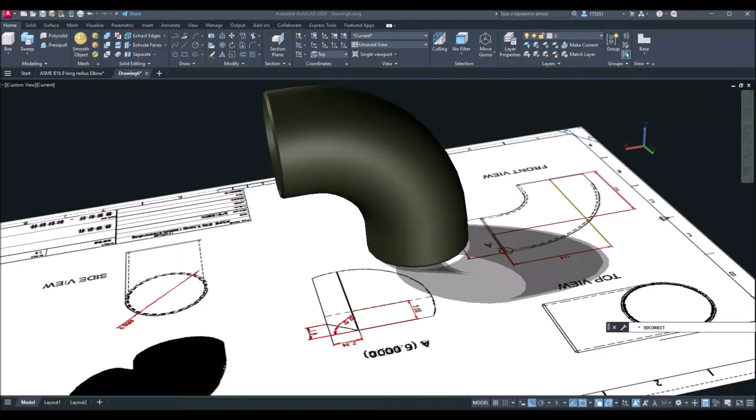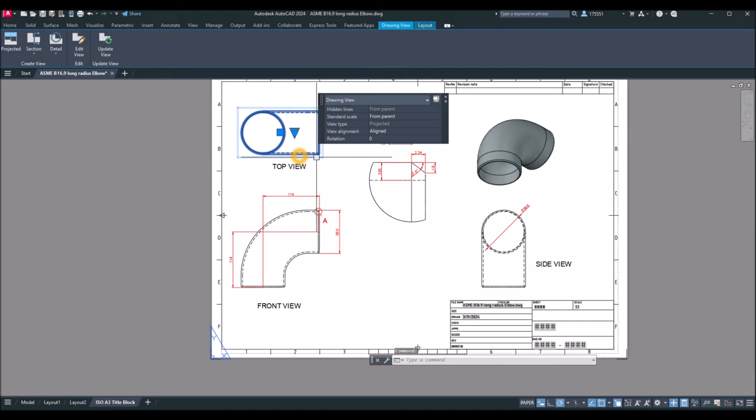In this tutorial, I'm going to draw a long radius elbow, a 90-degree long radius elbow. This is my reference drawing, showing the front view. And this here is the diameter.

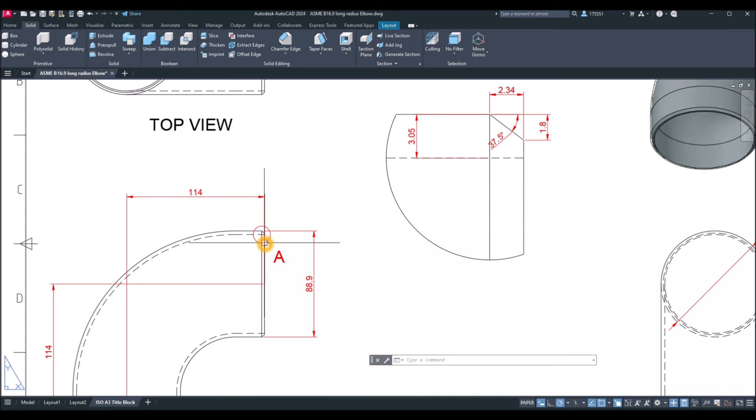Looking from the front view, and from the side view, this is the diameter, and this is actually this corner here. I scaled it 6 times. So this is the distance from the beveled end, which is 2.34, and 1.8 downward.

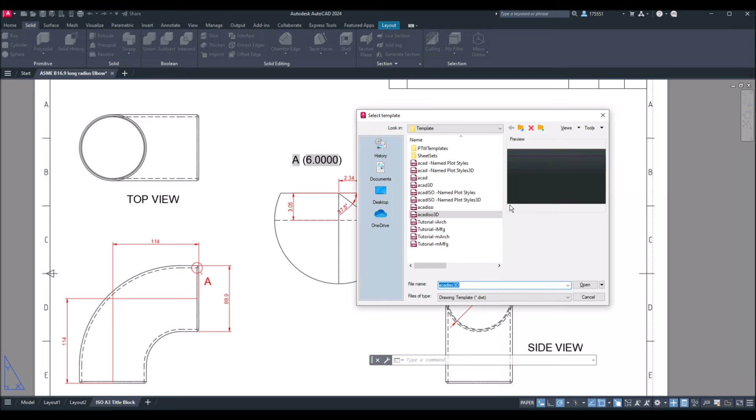I got that using a 37.5 degree angle, and the thickness is 3.05. Alright, so let's start a new drawing. Click this dropdown arrow, click new, and since I'm using millimeters, I'm going to use the AutoCAD ISO 3D template for metric units and click open.

I'm just going to arrange my window. Go to view, tile vertically, and make sure to work on parallel projection. So click this dropdown arrow by the view cube and select parallel, and also start working from front view, which is this one here.

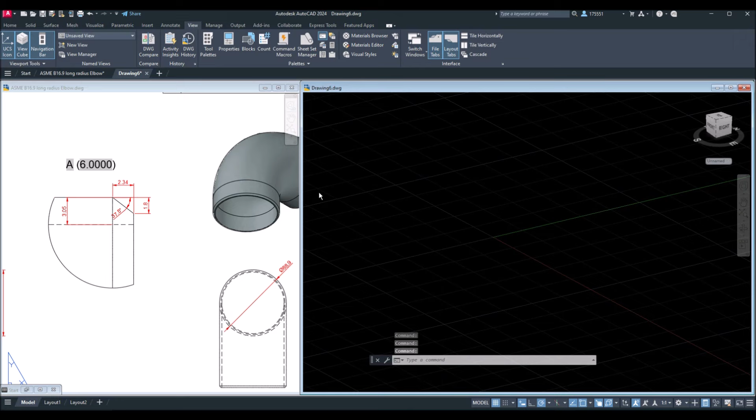Now I'm going to start with line. The distance from this midpoint to this midpoint, the horizontal distance, is 114. So L for line, go sideways for 114, go downward for the vertical distance from this midpoint to the midpoint here. Also turn on your ortho mode and dynamic input inside the status bar. I'm just going to turn my ortho mode on for now. So 114.

Now apply fillet. Go to home, and inside the modify panel you can find fillet here. Select the radius option inside the command window and enter 90. Enter, and select the objects: first object, second object.

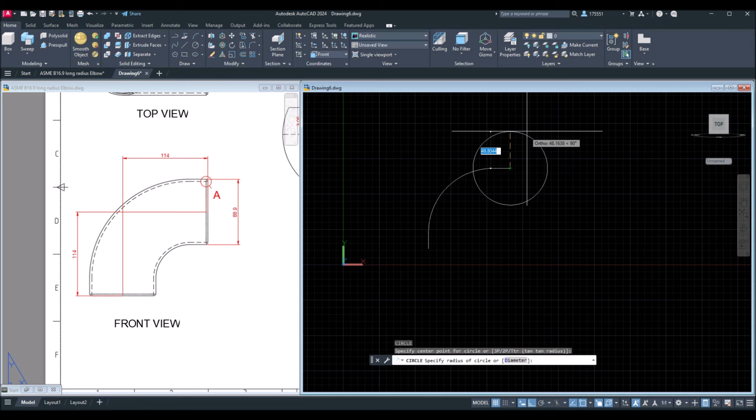Now I'm going to join the segments because these are broken segments. So J for join command, and just window the whole thing. Now this is one polyline. I'm going to draw the circle at endpoint and enter D for diameter option, and enter 88.9.

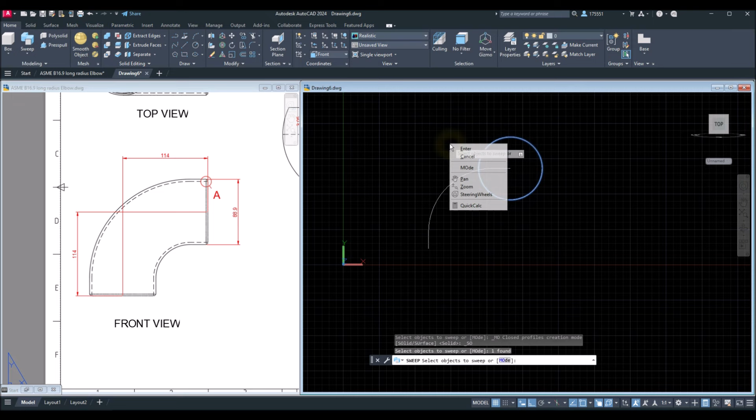Now I'm going to use the sweep command. Inside the modeling panel, click this - in case sweep is not showing, just click this dropdown arrow and select sweep command. Select the object you want to sweep, right click, enter, and select the path.

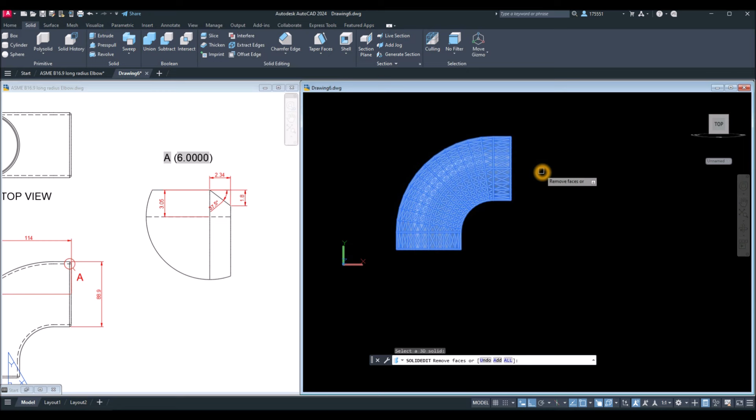Now I'm just going to turn off the grid, and the thickness for this elbow is 3.05 as shown here. So I'm going to use the shell command. Go to solid, select shell command, select the object you want to shell, and hold down the shift key and the wheel of your mouse to turn this around and roll it forward.

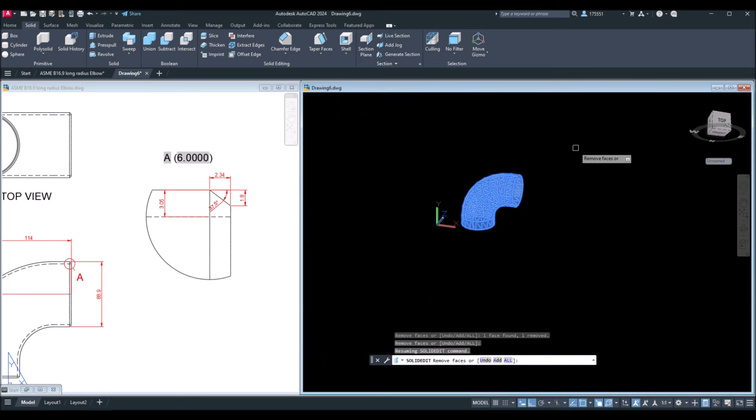Just be sure to make it closer, and click undo, one of the options here at the command window. Click undo, and undo this face because this entrance is going to be opened. Bring this closer again and select this face here. You can tell it's the right face because it's going to turn gray color, and enter. Thickness is 3.05. Enter, and enter again.

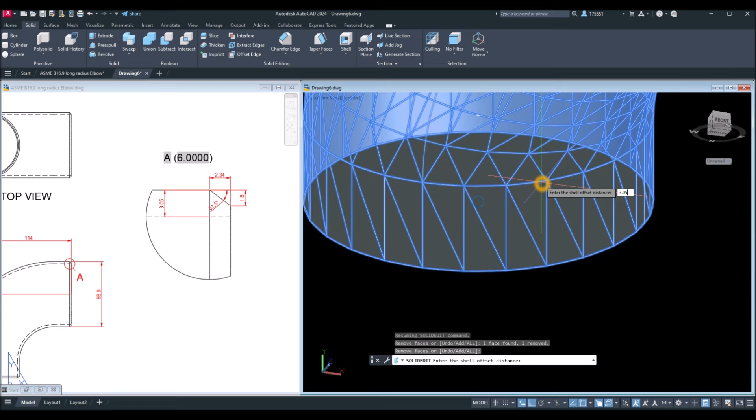Now the end of this elbow is beveled for 37.5 degrees, and I figured the distance here is 2.34, and downward is 1.8.

Inside the solid editing panel, select chamfer edge, and go down to the command window again. Select the first distance, 2.34. Enter, okay, 2.34, enter. For the second distance, click this distance option and enter 1.8, enter again.

Okay, I'm going to redo that. Chamfer edge, distance is 2.34. Enter, and specify - see, AutoCAD is asking to specify second distance, and enter 1.8, and enter again. Select an edge, so select this edge here.

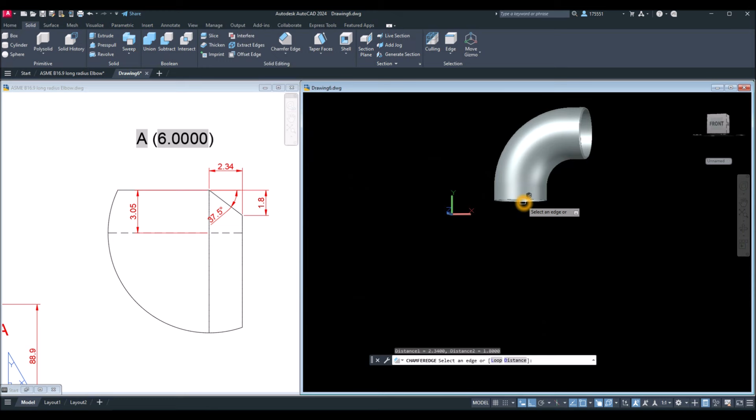Enter again, same process. Just right click, select chamfer edge, and just click that edge. AutoCAD remembers the last value that you entered. So click that edge, enter, and enter again.

Now I'm going to bring my drawing to front view and check, and bring this to 2D wireframe. I'm just going to check the distance here if it's correct. Okay, this distance from there is 2.34, so that's right. Right click again to repeat distance. Just click that, and from there - see, it's 1.8. So we're good.

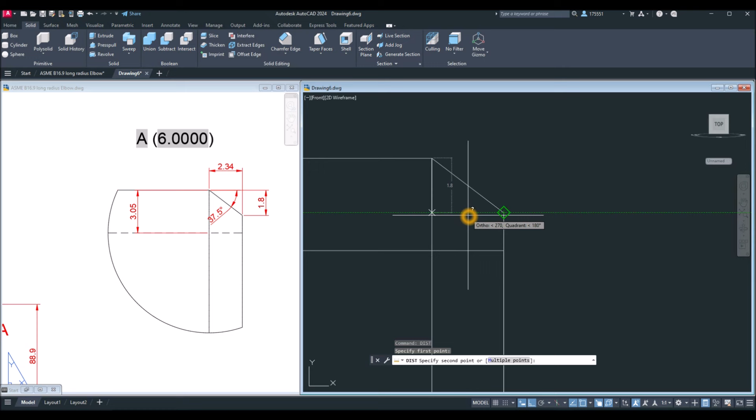So I'm just going to change this to realistic, and I think we are done.